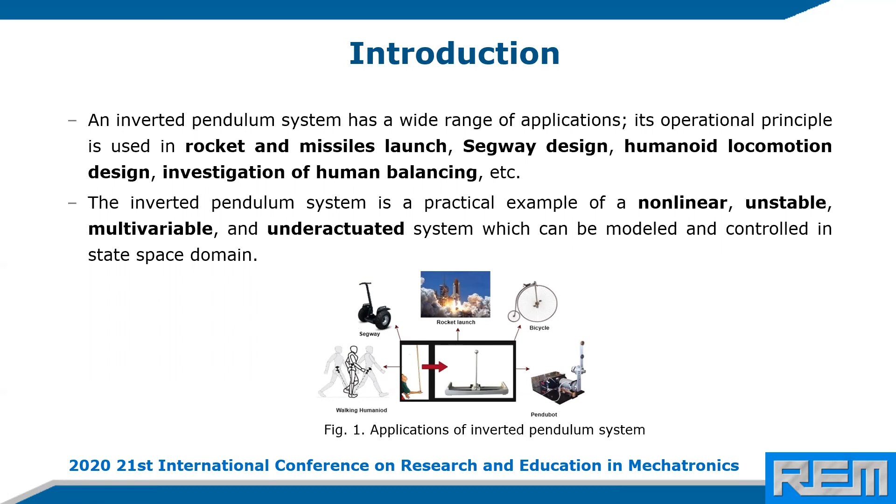The introduction now. An inverted pendulum system has a wide range of applications. Its operational principle is used in rocket and missile launches, and Segway design. We are showing that through this figure. The system is nonlinear, unstable, multivariable, and underactuated, and it can be modeled and controlled in the state-space domain.

The two main modeling techniques are done through Euler-Lagrange dynamic formulation and Newtonian dynamic formulation. The control methods applied to the linearized equations of single and double inverted pendulum include PID control, pole placement control, linear quadratic regulator control, fuzzy control, model predictive control, sliding mode control, and in some cases they combine two of these control techniques to form hybrid control, such as PID plus LQR and fuzzy with sliding mode control, and so on.

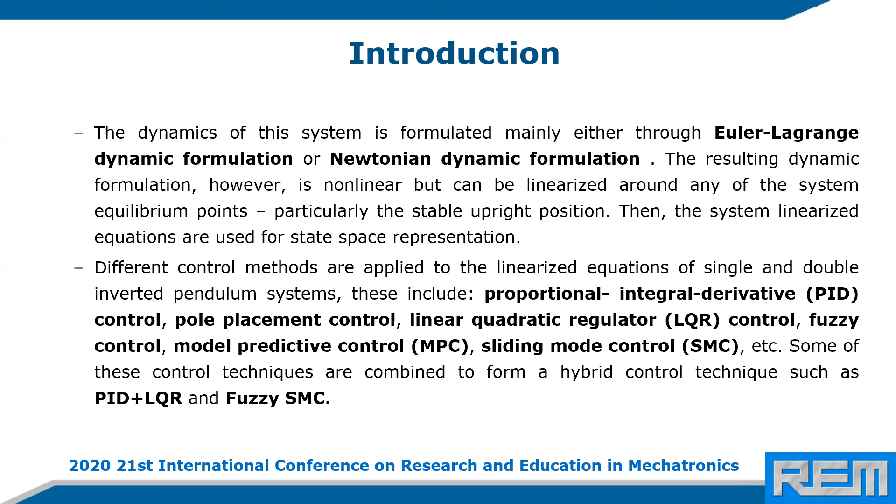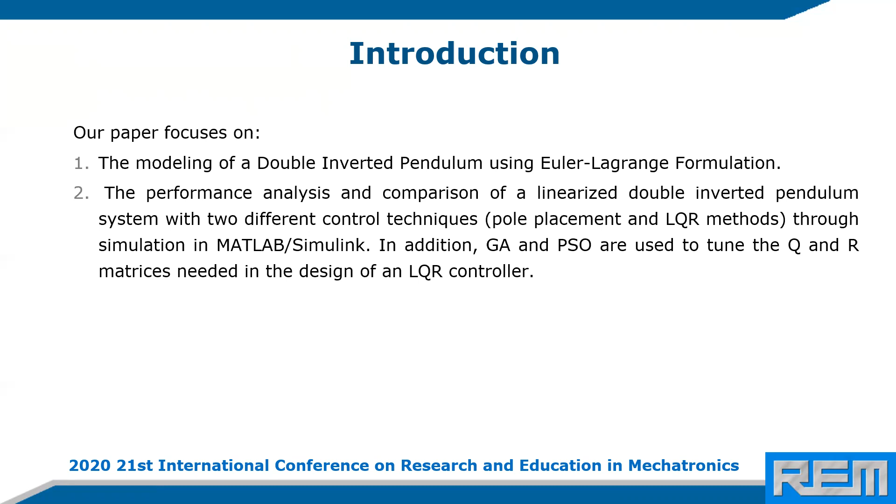Our paper focuses on the modeling of a double inverted pendulum using Euler-Lagrange formulation. We also consider the analysis and comparison of a linearized double inverted pendulum system with two different control techniques: pole placement and LQR method. We validate our results through simulations, and GA and PSO were also used to tune the Q and R matrices used in the design of the LQR controller.

The modeling of the double inverted pendulum. This is the Euler-Lagrange dynamic formulation, where L is the Lagrangian, T is the total kinetic energy, and P is the potential energy.

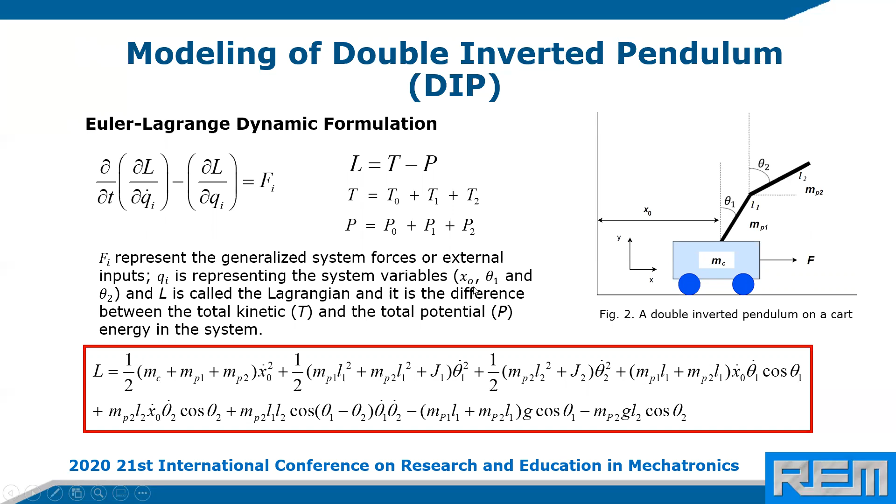What we do in modeling the system is find L, by getting T and subtracting P from T. After getting L, it's substituted into the Euler-Lagrange dynamic formulation, and we get three equations based on the system variables: x0, θ1, and θ2.

These three nonlinear equations are then linearized about the system equilibrium point at θ1 equals 0 and θ2 equals 0. The following conditions hold at the equilibrium position: cosine of θ1 will be equal to 1, sine of θ1 will be equal to θ1, cosine of θ1 minus θ2 will be equal to 1, and so on.

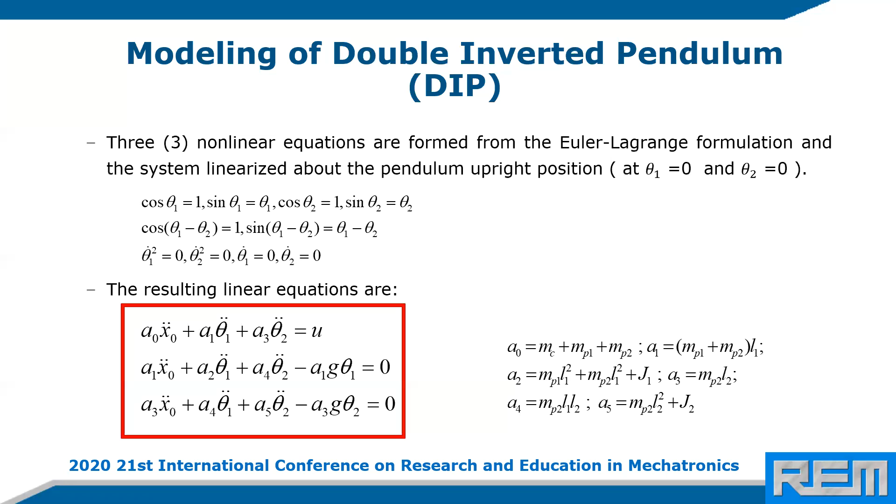The resulting linear equations are these. These linear equations are then represented in state space form. This is our A matrix, this is the B matrix. Our C is an identity matrix, and D is 0. The size of C is 6 by 6. And these are the parameters we used for our system.

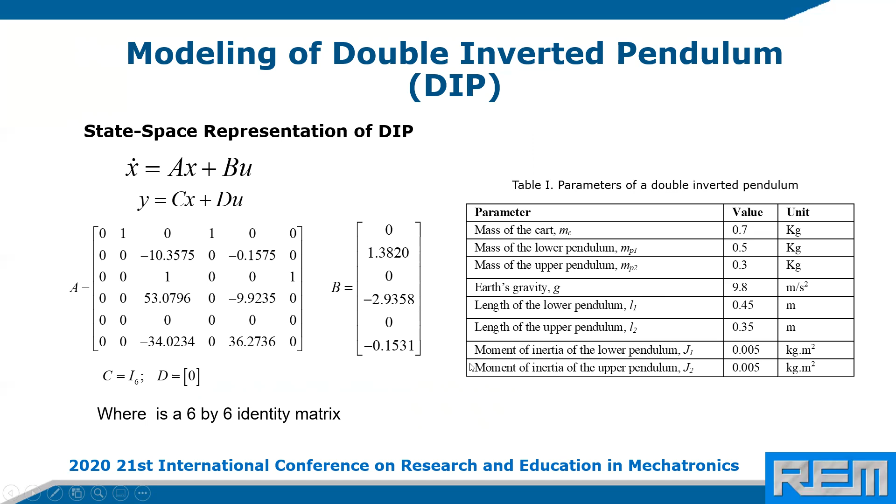For the control design, starting with the control goals: our desire is to stabilize the lower and upper pendulum at the upright position, and we want to command the cart to a new position, 0.1 meters. For the pendulums, the requirement is to settle in less than 3 seconds, with a maximum overshoot not more than 20 degrees. Also for the cart, we want the settling time to be less than 3 seconds and the rise time to be less than 0.5 seconds.

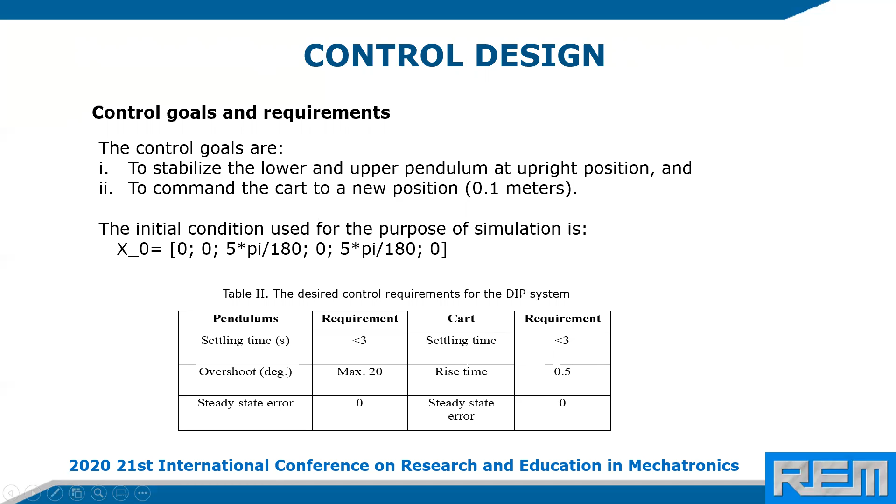So we design a pole placement controller here. In the design of pole placement control, the closed loop poles are located at a desired position, but a necessary condition for placing a pole at an arbitrary point is that the system must be completely state controllable. This test is also known as the Kalman's test.

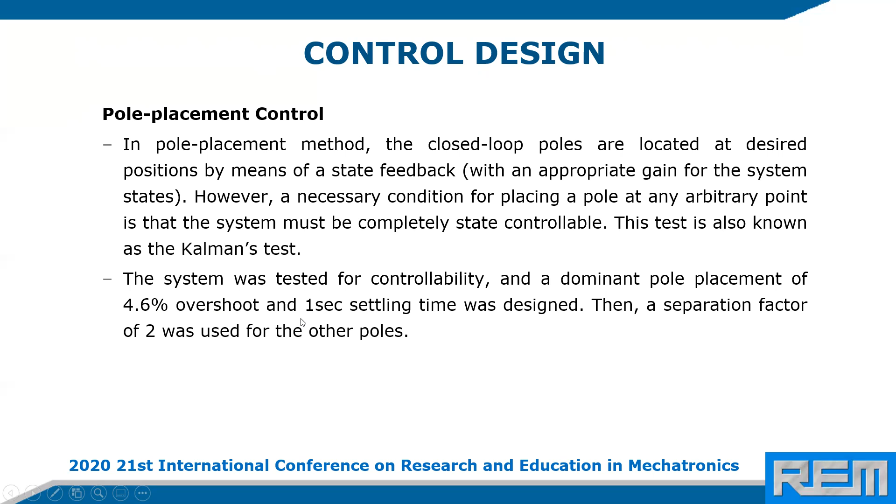Based on the requirements I mentioned in the previous slide, we set our dominant pole to have 4.6% overshoot and 1 second settling time, and a separation factor of 2 was used for the other poles.

For our LQR control design, LQR is an optimal control technique. It accounts for Q and R matrices, which represent the weight or cost functions of the state deviation and the control input respectively. The objective in LQR is to get an optimal gain value or optimal controller that minimizes this performance index.

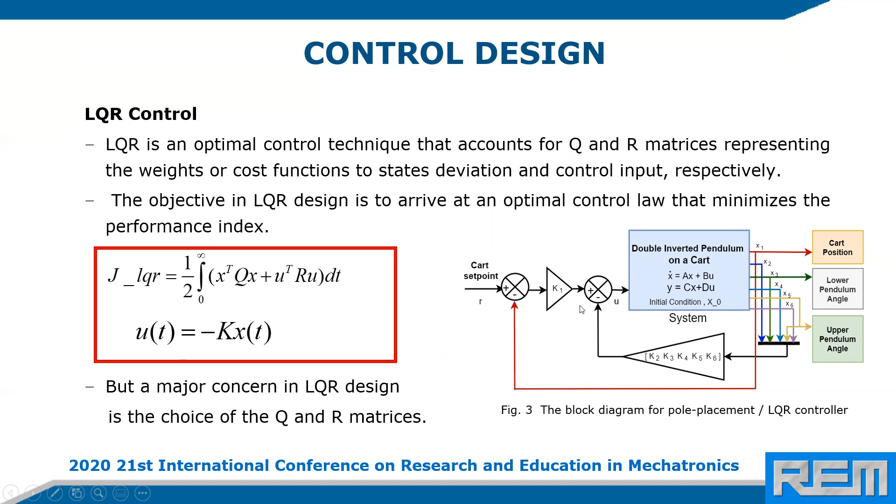This is the block structure for the pole placement or LQR controller. These are the gains for state, the second state to the sixth state, and this is the gain for the first state.

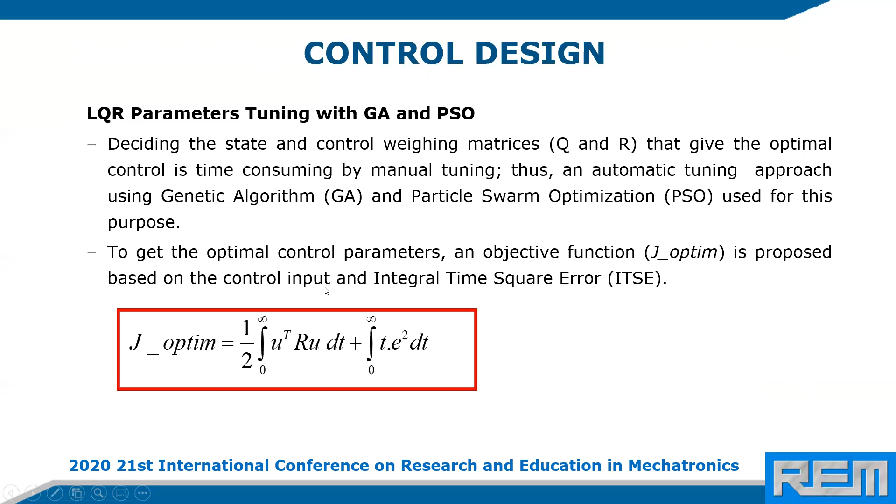Also, we tune the parameters of LQR using GA and PSO. In tuning the parameters, we define an objective function which is based on the control input and integral time square error.

This is the flow chart of the GA and PSO algorithm. For the GA, we start with the initialization of the genes, and we initialize other GA parameters like population, which we set to be 100.

Then we evaluate the fitness function of each chromosome. We then select the fittest of the population and do operations such as crossover and mutation. We check here if the stopping criteria is met, which could be the number of generations or iterations, the time limit, or the function tolerance. If any of this is met, we output the optimal solution. If not, the generation will be increased and the process will continue.

PSO is almost similar to GA. After evaluating the fitness, we calculate and update the personal best of each particle and the global best of the population. Then we calculate and update the position and velocity of the particles. We check again for the stopping criteria.

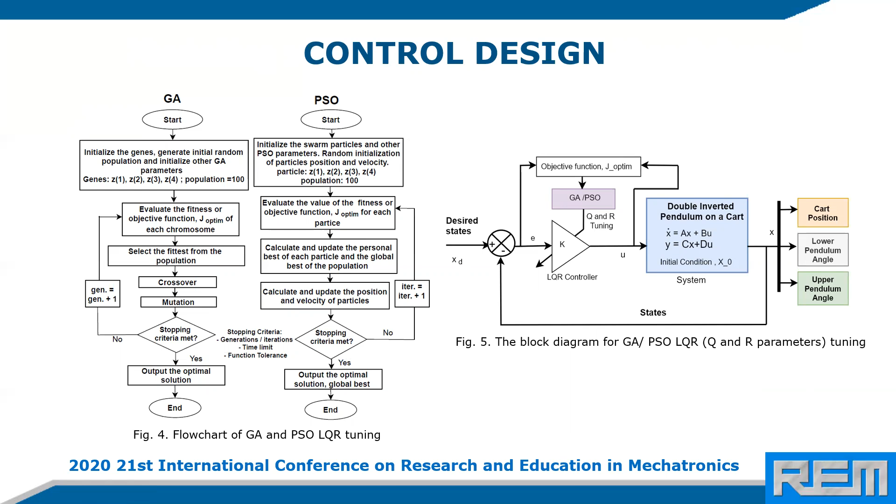If it's met, we output the optimal solution, which is the global best particle. If not, we increase the iteration by 1. So this is the block diagram we use in implementing the GA or PSO tuning. For a simulation result now,

this is the desired pole locations we got, and this table is showing the summary of the system performance with pole placement control. The rise time, the settling time, the peak amplitude, and the steady state error of the cart, the lower pendulum angle, and the upper pendulum angle are shown here.

The cart settled at 1.6 seconds. The lower pendulum is settling at around 1.5, while the upper pendulum around 1.7 seconds. This is the result of pole placement control.

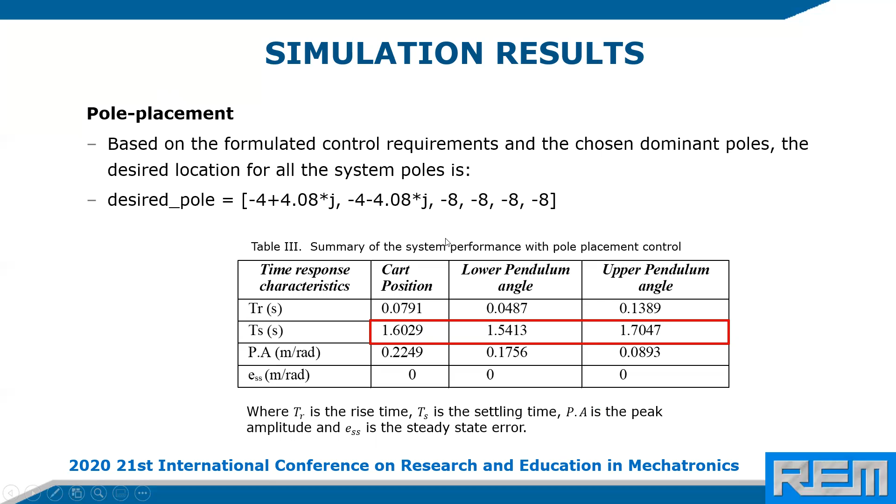For the LQR, we did manual tuning and we consider first 4 cases. For the first case, Q has the diagonal elements all equal to 1, and R is 1 as well.

So this is the result of the cart and the pendulums. The settling time of the cart was around 4.9 seconds, while the lower pendulum around 3.45 seconds. And for the second case now, we increase the first element in Q to be 10,000, and the results improved. The cart settling time, for instance, improved from 4.9 to 1.59.

And here we look at if we reduce R, what will be the effect on the performance of the system too. As shown here, the settling time is also improving, and at the same time, the rise time of the system is also improving.

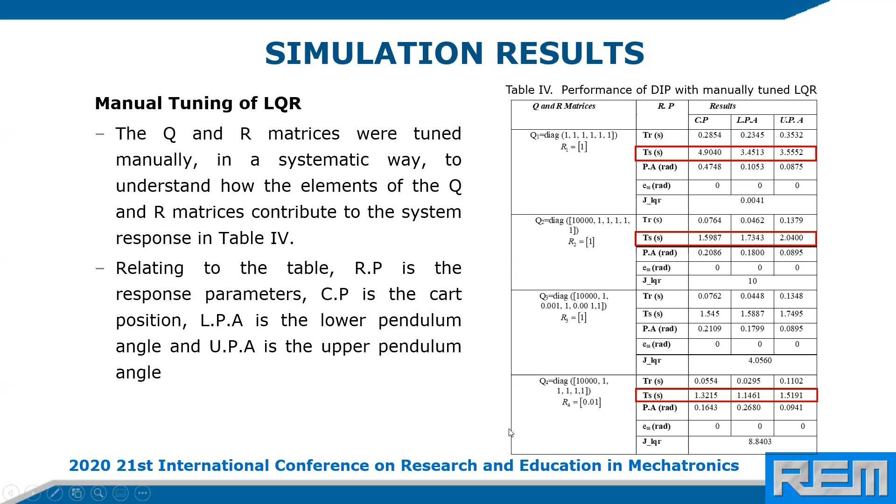Then this is showing the plot of the fourth case. This is the control effort. We have the effort to be around 100 here, and we have the cart response there, and the pendulum response is at the middle.

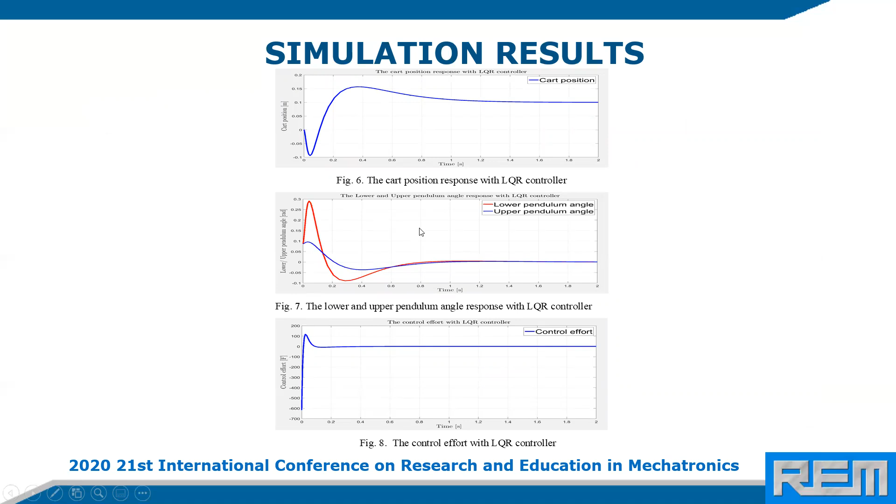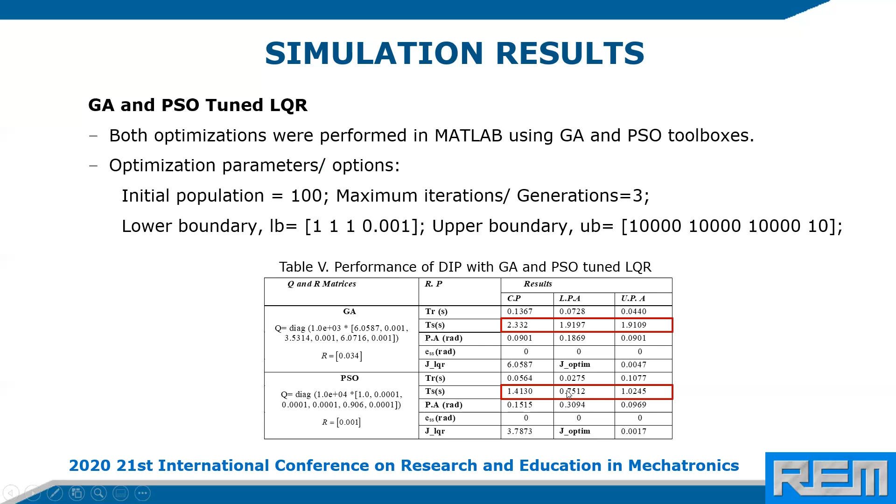Here, I'm going to show a short animation we did when we desired the cart to be at 1 meter. So this is the response of the system. This is showing how the system would behave.

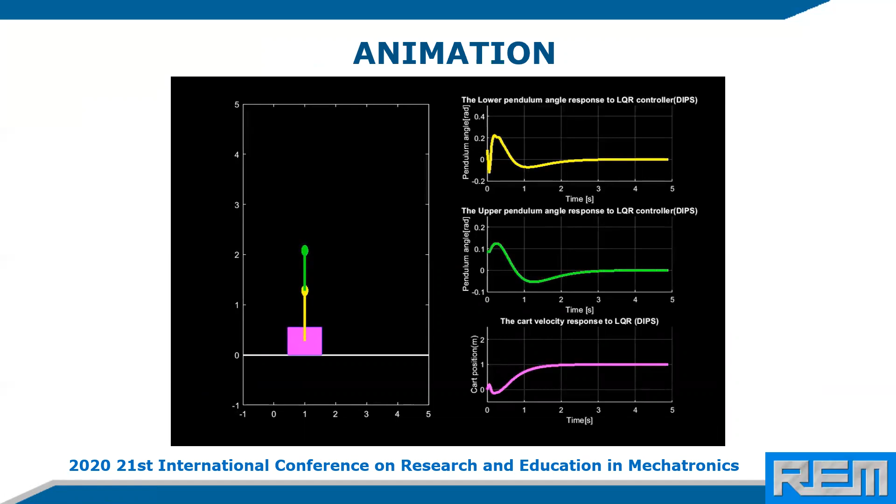So to the discussion of our results now. From the simulation result, the PSO tuned LQR gave the best transient performance in comparison with the GA tuned and manually tuned LQR and the pole placement controller. The settling time of the cart, the lower pendulum, and the upper pendulum were improved by 11.85%, 51.26%, and 39.9% respectively by the PSO tuned LQR when compared with the result of the pole placement controller.

In addition, we find out that the PSO tuned LQR gave a better result than the GA tuned LQR. So PSO is better than GA when searching for the optimal values of the Q and R matrices used in the LQR control.

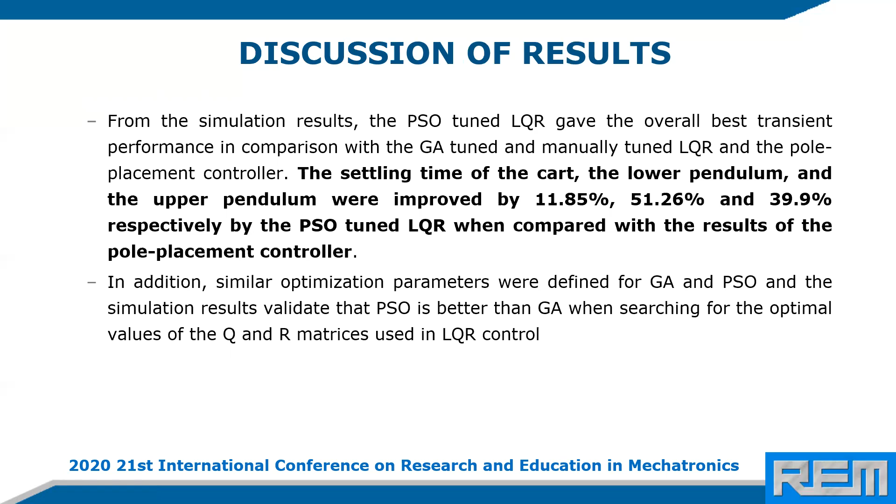Conclusion: the control goals and requirements were met by the controllers. The pendulum stabilized in less than 3 seconds, the cart also, and the rise time of the cart was not exceeded, the rise time we set.

Furthermore, the PSO tuned LQR gave the overall best transient performance in comparison with the GA tuned and manually tuned LQR and the pole placement controller.

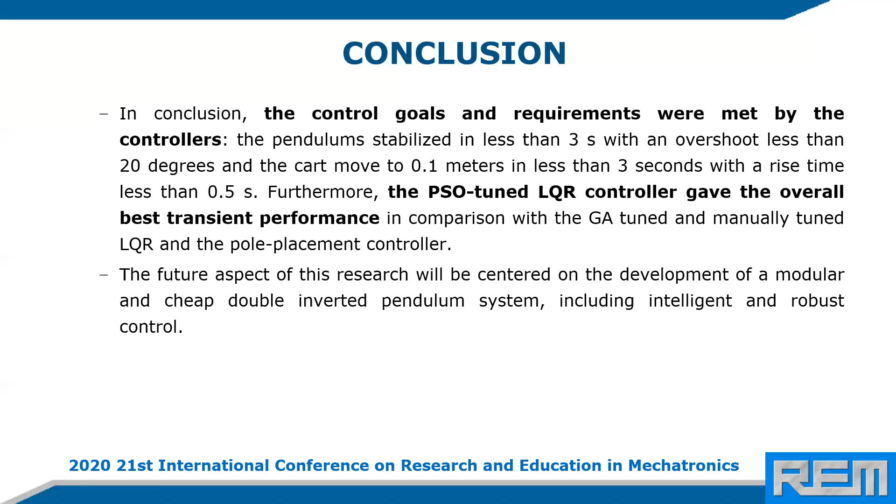In the future, our research will be centered on the development of a modular and cheap double inverted pendulum, and our work will include the intelligent and robust control of the system. Thank you so much.